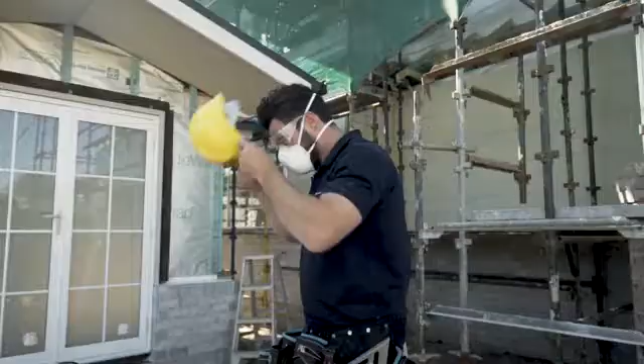Hi and welcome to this online demonstration of how to install James Hardie Stria Cladding. Designing and building to get that classic look is all about getting the process and the details right, so let's get this done. To start off, you'll need your choice of Stria Cladding in standard, wide or splayed profile.

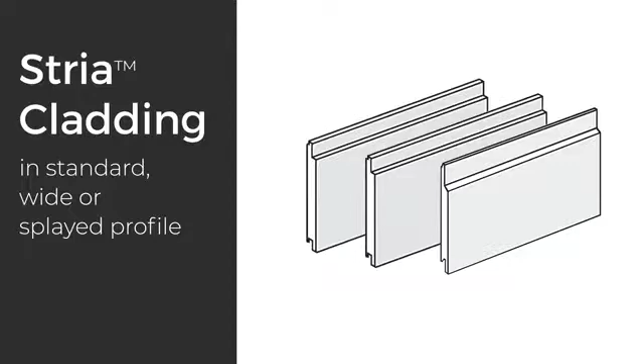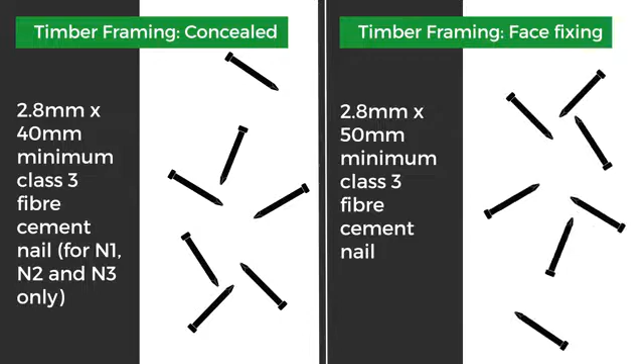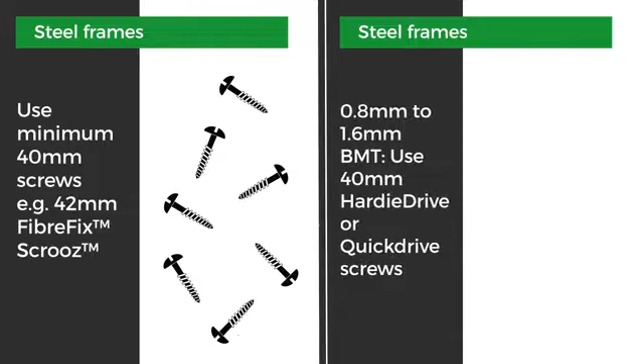James Hardie HardieWrap Weather Barrier, James Hardie Joint Sealant. For a timber frame concealed, you'll need a 2.8 by 40mm Class 3 fibre cement nail. Timber framing face fixing, you'll need a 2.8mm by 50mm Class 3 fibre cement nail. For steel frames, use minimum 40mm screws. Use 40mm HardieDrive or Quickdrive screws. And bond breaking tape for use behind sealant at joints.

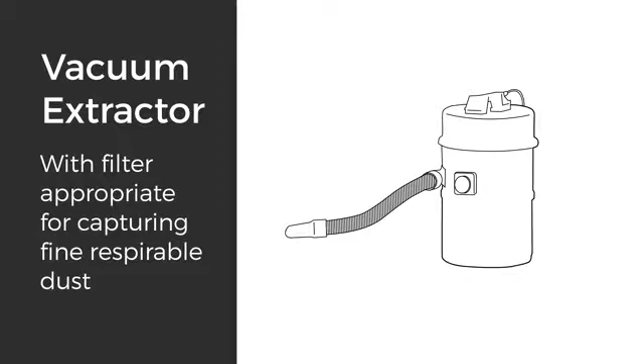So the tools you'll need: a spirit level, drill, HardieBlade saw blade or comparable fibre cement blade, vacuum extraction with filter appropriate for capturing fine respirable dust, story rod and your PPE.

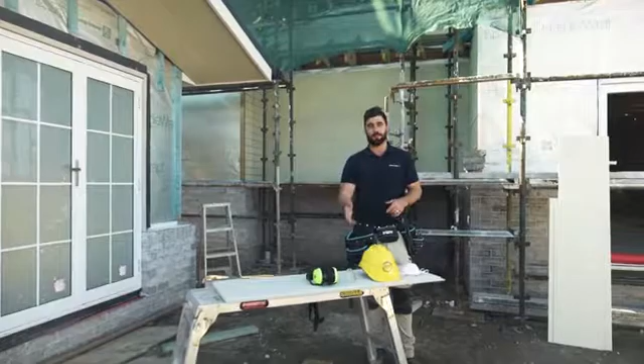Okay guys, so safety first, always wear your P1 or P2 dust mask, your standard PPE, and always make sure you're cutting in a well ventilated area. Tell people in the immediate area that you will be cutting and there will be dust, and never cut indoors. When using a power saw, always have a dust extraction system connected to the saw. For more information, check out the James Hardie safety data sheet.

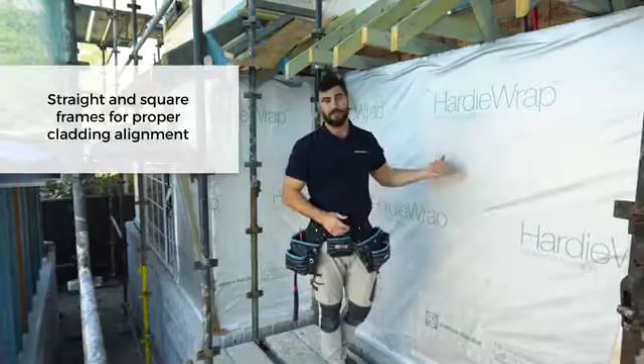Okay guys, before you start cladding, it's very important to get your prep right. So make sure your frames are straight and square to avoid any alignment issues. You can use a timber frame or steel frame, doesn't matter. You can install your Hardie edge trim, then the HardieWrap, and then you're good to start cladding. Okay, generally, internal and external corners have additional framing requirements, and the flashings and corner accessories need to be installed prior to installing the cladding.

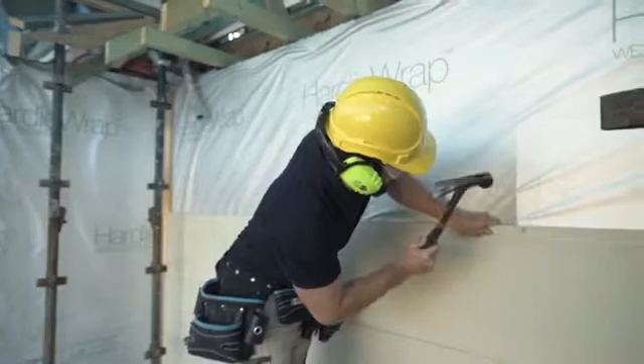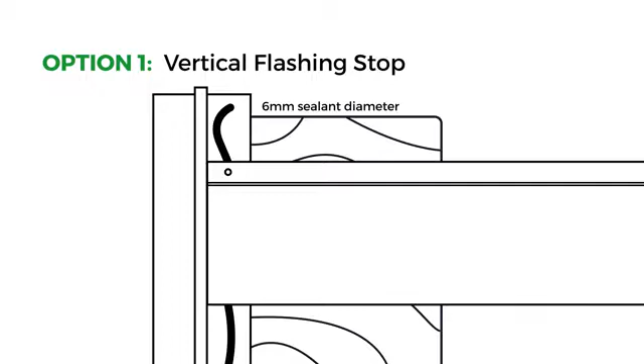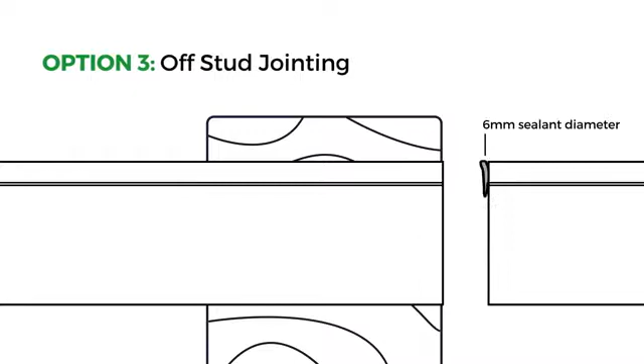Okay, one more thing you need to consider is the layout of your cladding, and there's three options for this. Option one, when joining on stud, you need to use the vertical flashing stop to emphasize the joint. Option two is a traditional butt joint on stud with the silicone in the joint and the bond breaker tape behind. Option three is joining off stud with the polyurethane joint sealant through the butt joint, and there's no flashings required. Okay guys, when doing your butt joints, make sure you stagger your joints by 2 or more stud lines so you get good looks and integrity.

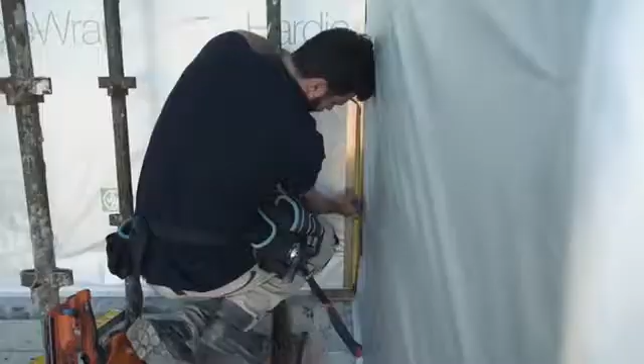Now the prep work is done, I'm going to break down the installation process into 5 easy steps. Okay, step 1, mark 20 to 50mm past the slab edge for your first board. This situation we've got here is a raised flashing detail, so it's a little bit different, but as long as you've got enough clearance for water and moisture to get out past your flashing at the base of your board, that's all you need.

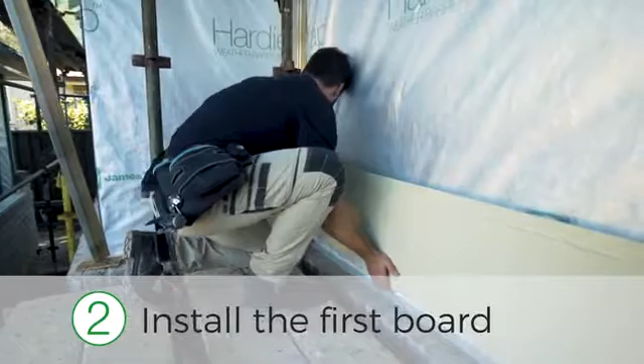Step 2, install the first board, ensuring that the top of the board hits the datum line you've already pre-marked. So put a fixing in the underlap where you don't see it, and then check your wind classification to see if you need another fixing on the face.

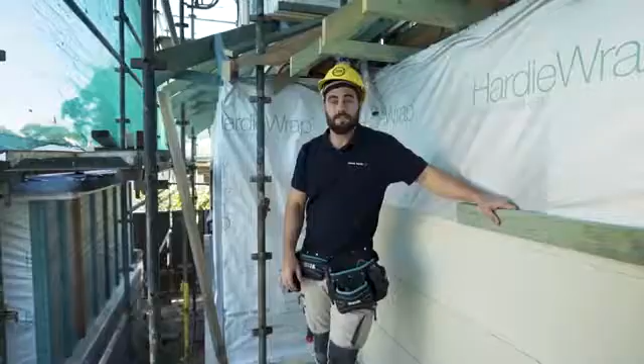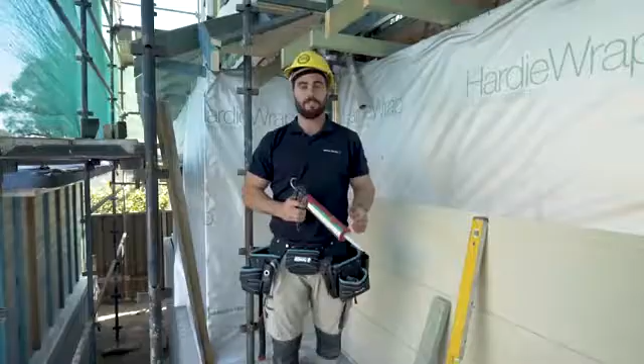So step 3, make sure your boards are locked in nice and tight. Use a decent sized block to tap them in and make sure they're level. When joining off stud, apply a 6mm bead of James Hardie joint sealant to the butt joint. So step 4, fill your internal corners with the James Hardie joint sealant to fill up that 2mm gap.

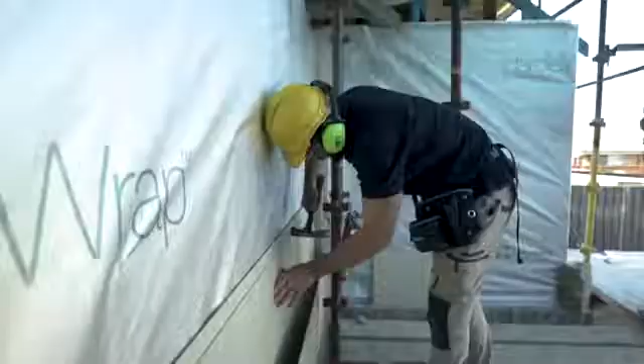Step 5, repeat the process, just fix off all the remaining boards until you have a professional finish. Okay, so now that you've installed your Stria cladding, it can be left exposed for up to 90 days before painting.